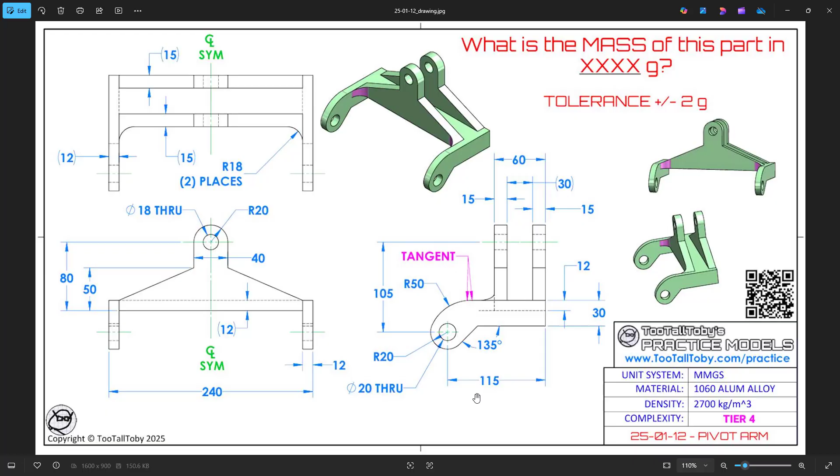Looking at this overall even side profile, this one can be a little tricky, but in IronCAD it can be very simple with a dimension of 115 and then also looking at a dimension of 105. We'll get started.

So we'll begin in the scene. We'll drag out an extrude block. We'll adjust the length to make it 240. But we'll also subtract 24 from each side because the side profiles would be 12.

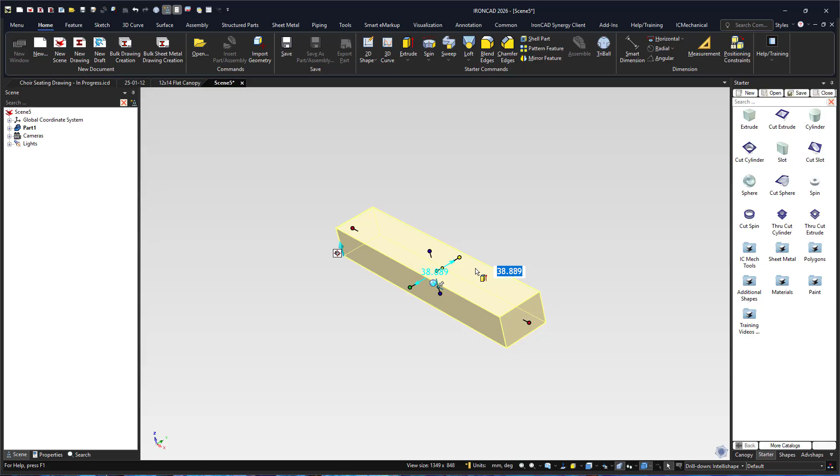So it'll be 24 minus 240 will give us the length. We'll bring this back to be 60. And then what we'll do is we'll bring this down to be about 12.

We'll drag out another extrude block, which will help us get that front face column. We'll drag this out to both ends. We'll adjust the width to be about 40.

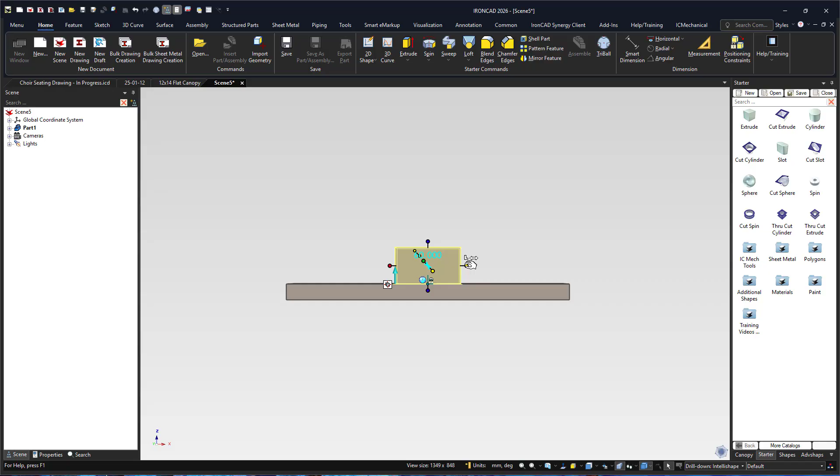And then what we'll do is we'll adjust the height from that bottom point, which we'll put at 80, which will give us that dimension there.

We'll drag in a cylinder profile, drag that to the back, make that face equal to one another, and add in the cut cylinder.

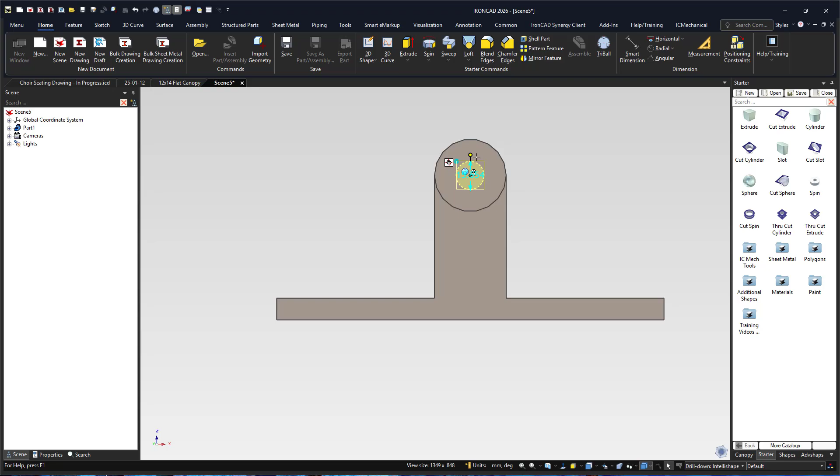This has a dimension or diameter of 18. What we'll do is we'll go back and make sure that it goes all the way through to that back edge.

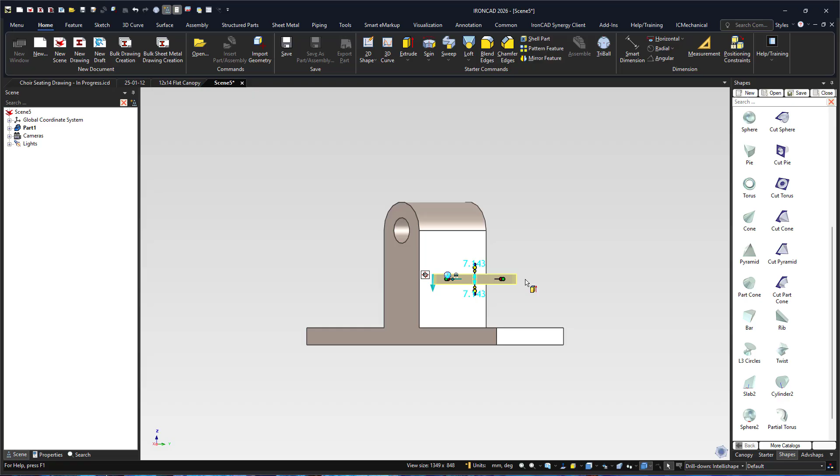Okay, and for those side profiles, we'll actually use the rib, which we'll have here. We'll just adjust the rib to make sure that it's in the right position.

So I'll use the TriBall, rotate it 90 degrees in one direction, and then I'll rotate it 90 degrees in this direction here. And then what I'll do is I'll go back to the front face.

What you can do is you can unlock this TriBall and let it go to each point, but here I just put it down to the bottom, drag it back to that corner of the edge of this face, and then I'll bring it to that corner.

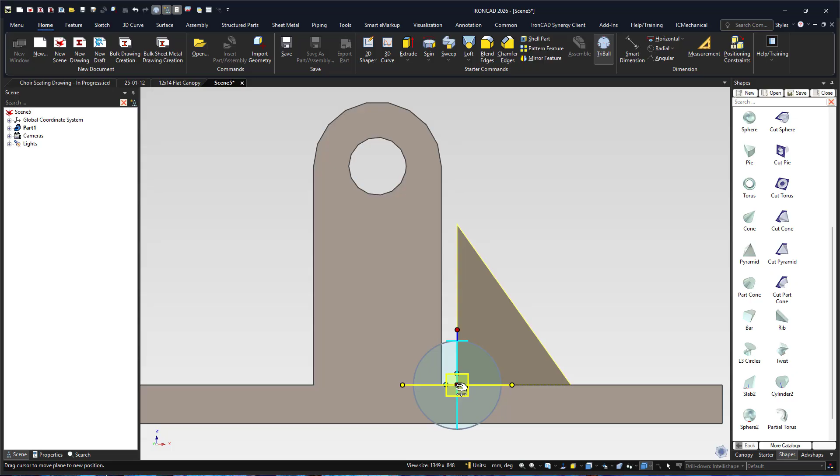And then what I can do now is I can drag it out to the end, and then I can update the overall width to make sure that it's equal.

All right, and what I'll do is now I'll put the TriBall here, and I'll mirror it to the other side.

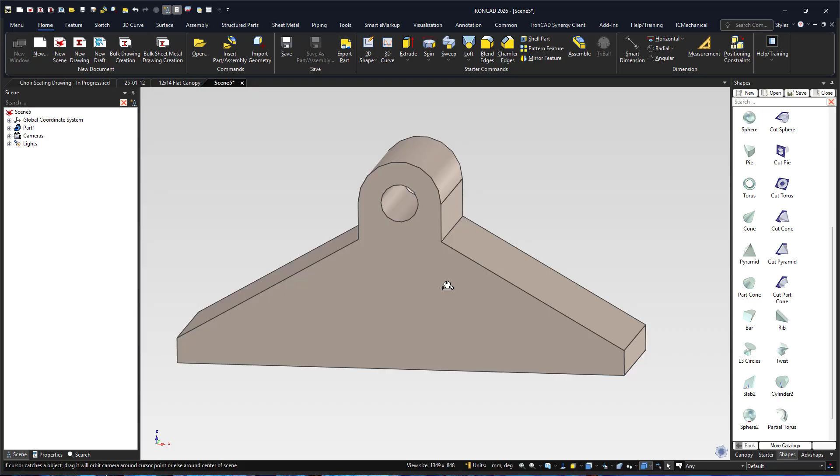Okay, that's good. Now what we'll do is we'll go in and add in another extrude block to get that side profile. So I'll make sure that it's coming down to reach this face here, this face there.

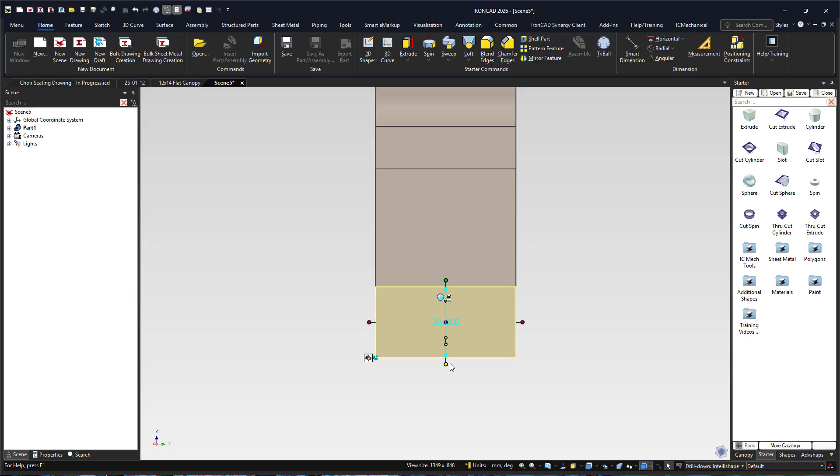Okay, and then it has a total height of 30. So I'll make sure that it goes down to 30 and it has a total width of 12.

Okay, so what I'll do now is I'll actually go inside to edit the cross section. Because that profile is a little bit tricky, we'll have to go inside and edit the sketch, but it should be very simple. So what I'll do is I'll start with the circular profile.

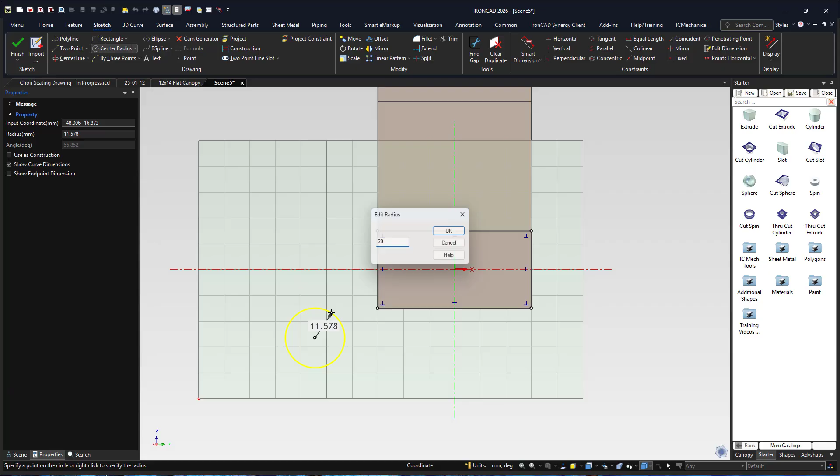That's a radius of 20, and I'll use the dimension tool. So from that back face to this center point, it was 115.

And then from this center point to the center point of that top cut cylinder was 105. So this will give us our base dimensions. I'll make sure to add a line or a tangent line there.

This has a radius of 50. So we'll have to adjust and edit this as we go throughout as well. So we'll make sure that it's tangent to one another.

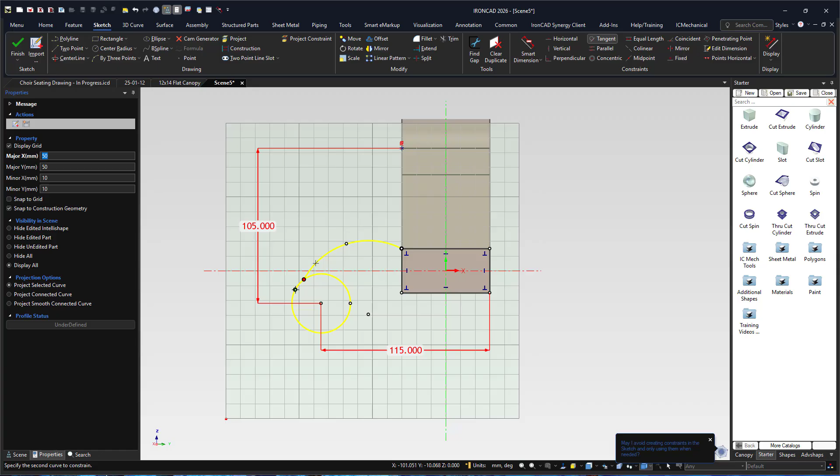Now what we'll do is grab a 2-point line and try our best to connect here. This part as well will be tangent. But before we do, we'll make sure that this angle here is 135 degrees. We'll fix this point as well and try to make it as stable as possible, as these points don't need to move.

Double check. Make sure that this point is also tangent to this face. Yes, okay.

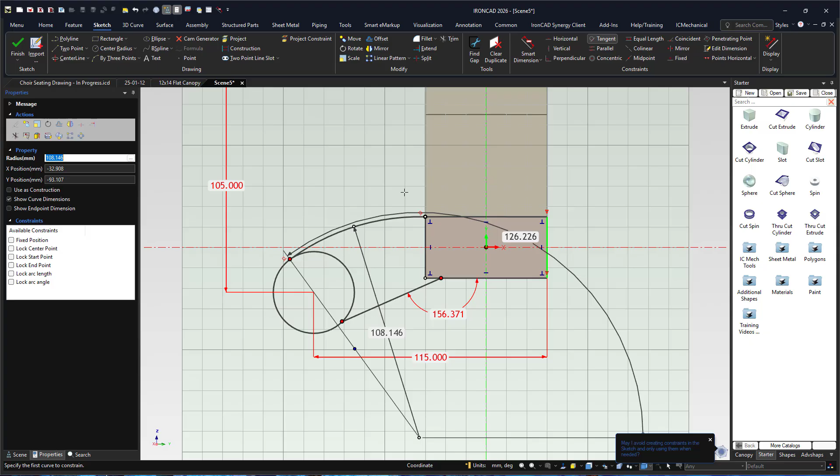We'll make sure to adjust this one to be 20. Yes, 20 diameter, I'm sorry, 20 radius, so it'll be 40, 40 in diameter. Okay, there we go.

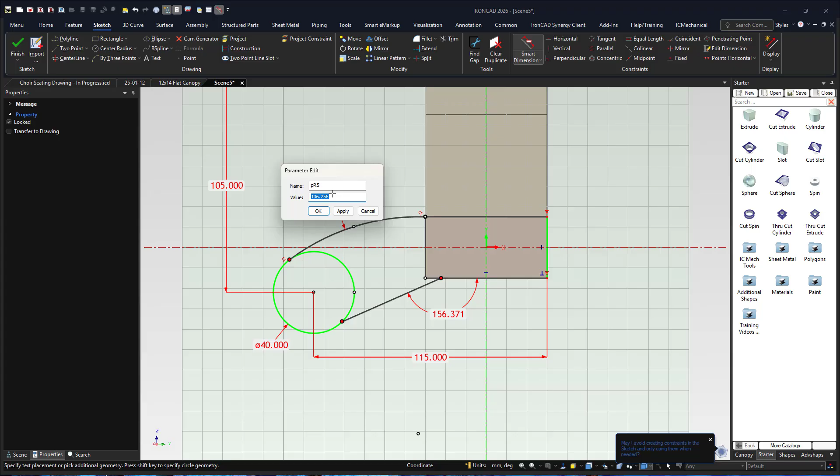So we'll make sure that's tangent. Make sure we have the dimension for this part here, which will be 50 for the radius. Now we'll make sure we need to go back and adjust.

We'll make sure that this point is also fixed as well, as we will not need to move this part. Okay, let's see.

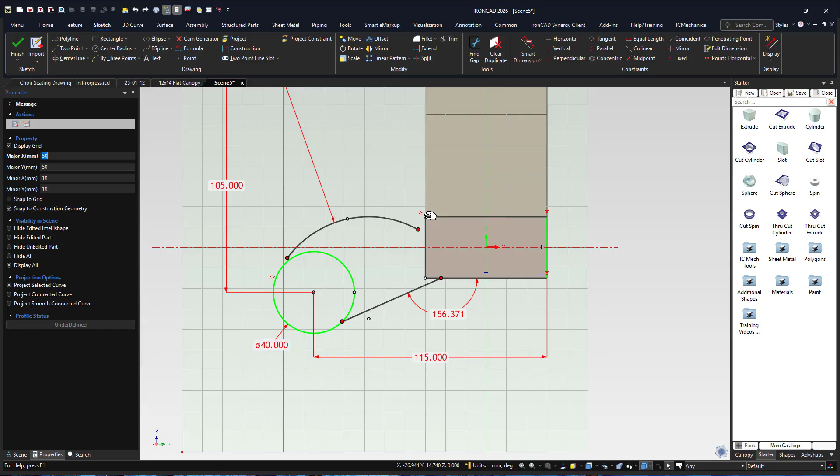Rather than fixing it, I think what we need to do is bring it back here. And then what we can possibly do is extend it, I believe. So let me make this horizontal, and bring this.

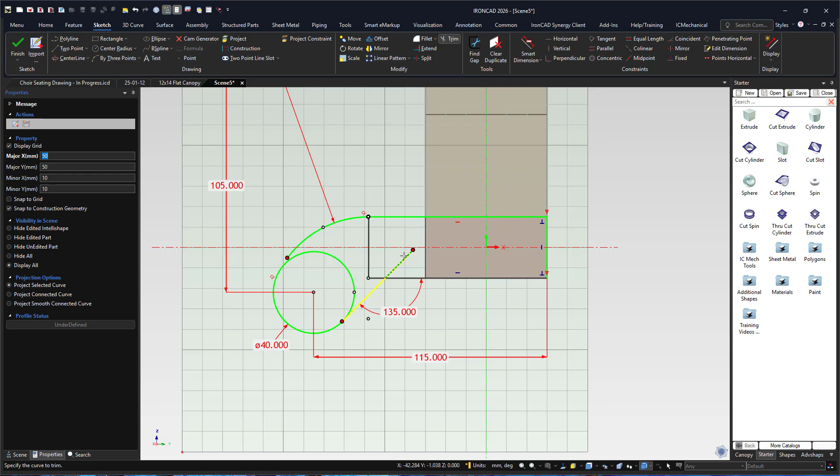Okay, let's try one more time. Adjust this to be 135. Bring this part. Ah yeah, so we can extend. There we go, we can extend here and we'll trim. There we are, trim these parts as well.

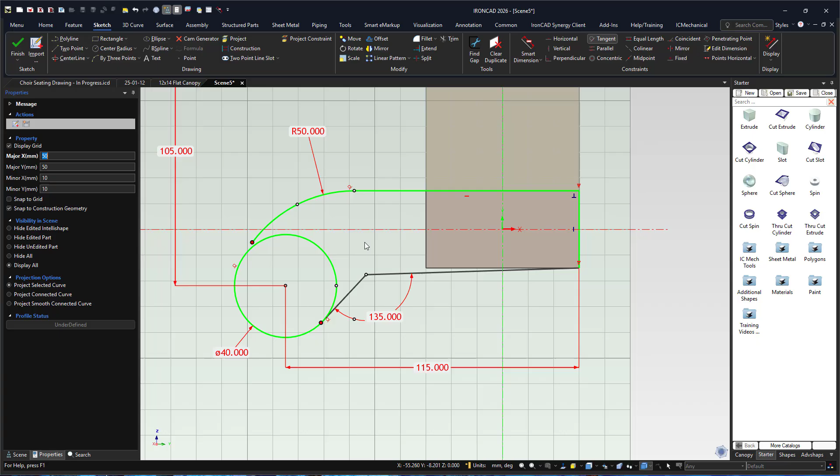So what we'll do now is go back and make sure the dimensions are correct. We'll go in, and now what we need to do is adjust this line to make sure that's tangent to this circle. Make sure that it's horizontal as well.

And then what we'll need to do is come back in and trim the circle. But before we trim, make sure that everything is connected. So we'll extend this point here and see if we can trim it. Okay, good, we'll extend there.

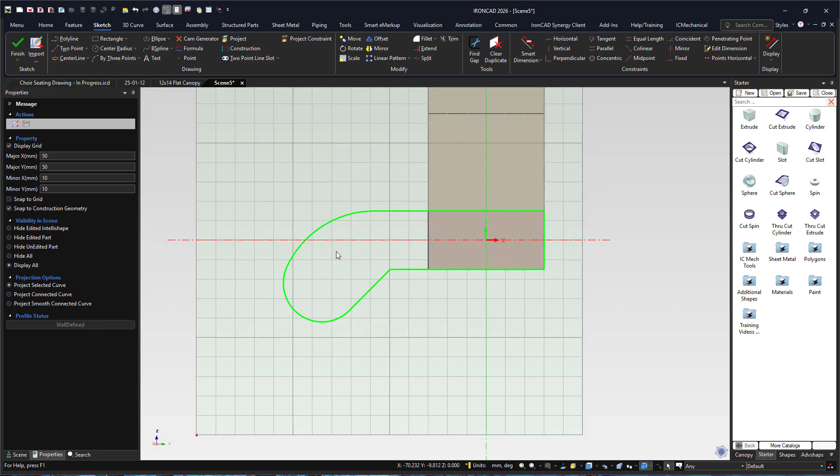Then we'll right click and connect here. All right, so this will give us that side profile. And what we can do now is add a center circle here for that inner cut.

And we'll make sure that gets set to 20, 10 for the radius, for a total of 20 diameter. And if we can, we'll go in and add that total dimension as well. So we'll click OK, this will give us that side profile.

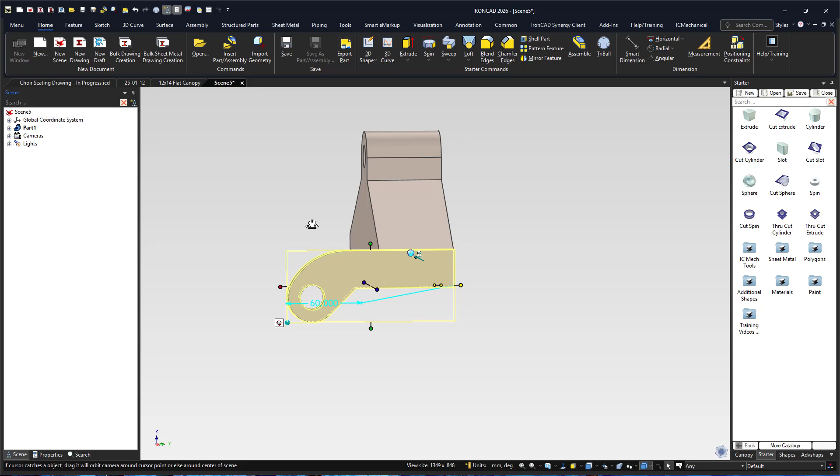Okay, so what we'll do now is actually go and try to mirror it onto the other side. So we'll select this part, drag it there, and mirror to the other side so that it's linked.

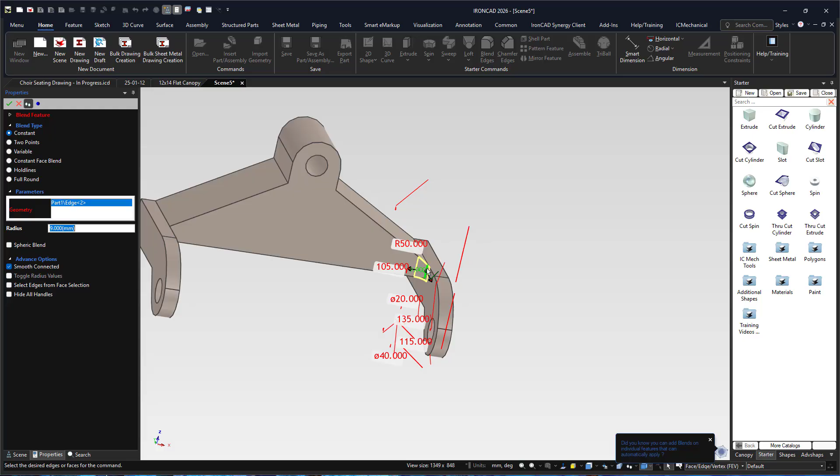We'll actually come in and add the blend. So the blend on this side will be 18 millimeters, 18 here, 18 there. Okay, hit OK.

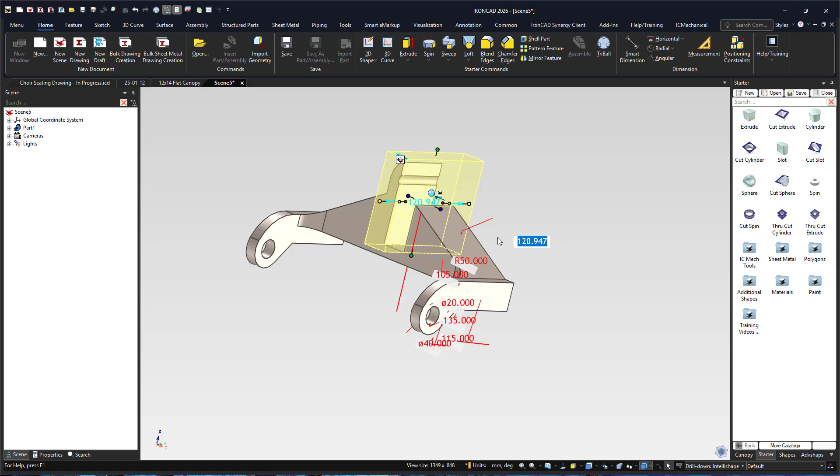Now what we'll need to do is go in and add an extrude cut, which will allow us to get that middle cut. So we'll bring that down, bring this all the way up as well, and we'll adjust the width of it. So let me go back in, adjust the width. Oops, the cylinder.

So bring it all the way out, and we'll adjust the width. I believe, looking at the dimension, the width was 30. All right, and this would give us our part.

So what we'll do now is go into the properties. We'll select it, go into the properties, adjust it to be 2700, and this is our total mass.